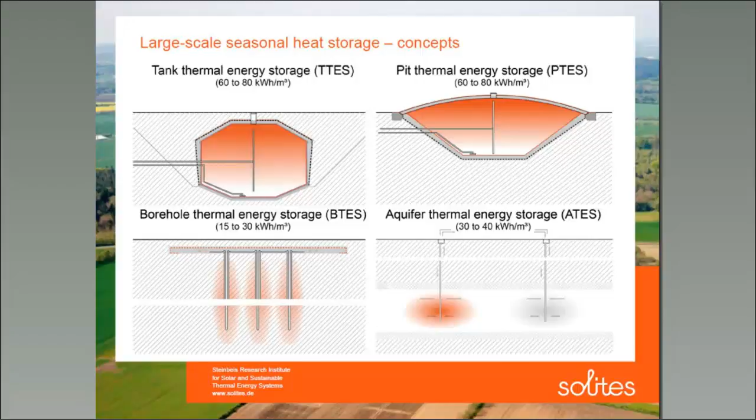The aquifer storage is an open system, so for bringing the heat into the ground or extracting it from the ground, groundwater is extracted from the ground layers and is heated up or cooled down by the system on top, and afterwards re-injected into the ground. So the following 2 projects I will present you are, as mentioned before, the first one with a pit thermal energy storage and the second one with a borehole thermal energy storage.

So on this slide you can see an air view of the solar system in Dronninglund in Denmark. We can see in the center the main heat source is the large solar collector field with almost 38,000 square meters of solar collectors. A little bit more in the back on the left we see the cover of the pit thermal energy storage with a volume of 63,000 cubic meters.

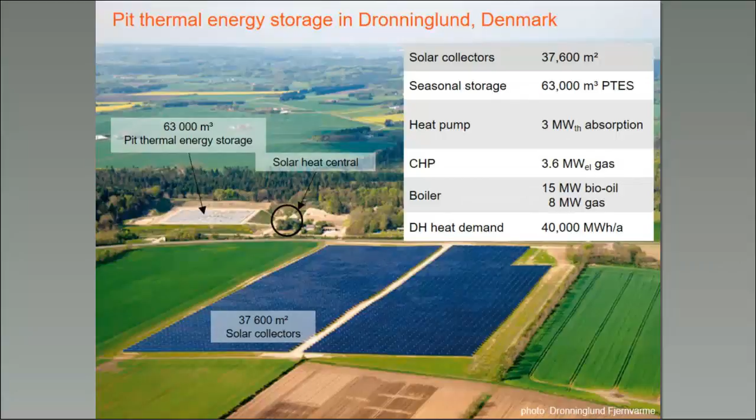This solar system is then connected by district heating pipes to the main district heating plant. In the district heating plant, as we can see in this table on the upper right side, there are some more energy producers like a heat pump, a CHP unit, some boilers, and the entire heat demand of the district heating network is about 40,000 megawatt hours a year.

Here you can see some pictures from the construction phase of the pit storage. On the upper left side, you can see the situation at the end of the groundworks. So the pit is realized and the walls are prepared for the installation of the liner. On the upper right side, you can see the plastic liner after installation. So the plastic liner at the bottom and at the side walls. It's an HDPE liner.

On both pictures, you can see in the center this tower. These are the charging and discharging devices. So there are possibilities on 3 levels to extract and inject water. The lower left side shows the storage after filling with the water.

And on the lower right side, you can see the cover construction, kind of a vertical section. So starting on the water surface with another HDPE liner that is floating on the water surface, followed by some supporting layers like some mesh grids and fleece, protecting fleece layers, and then followed by 3 layers of insulation material that are then covered and protected by another plastic liner to the surface.

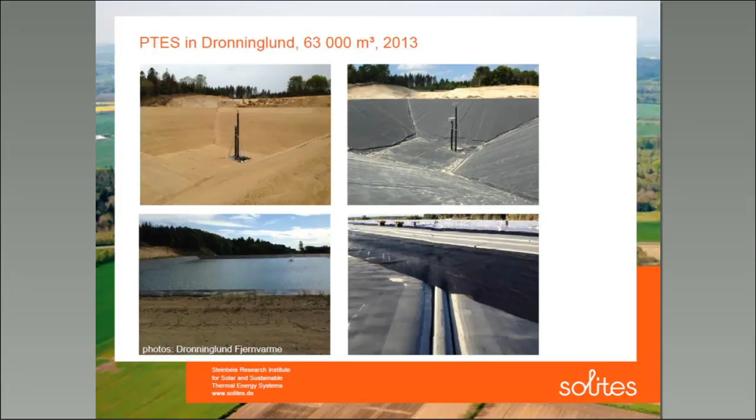So coming to some monitoring results, we can see on this graph the monthly heat balance for a 2 years period for the years 2014 and 2015. The orange bars show the monthly heat that has been charged to the storage, and the green bars show the monthly heat that has been discharged from the storage. The black dashed line shows the energy content development inside the storage volume.

So if we look at the orange bars, we can see a seasonal development. The main charging during the summer period and hardly any charging during the winter period. If we look at the green bars, at the discharging development, we can also see a seasonal development, but it's not so clearly separated as for the charging. So during the summer period, we can also see large amounts of discharging. So this shows us that the storage is not only used for seasonal storage, but also in parallel for short-term storage.

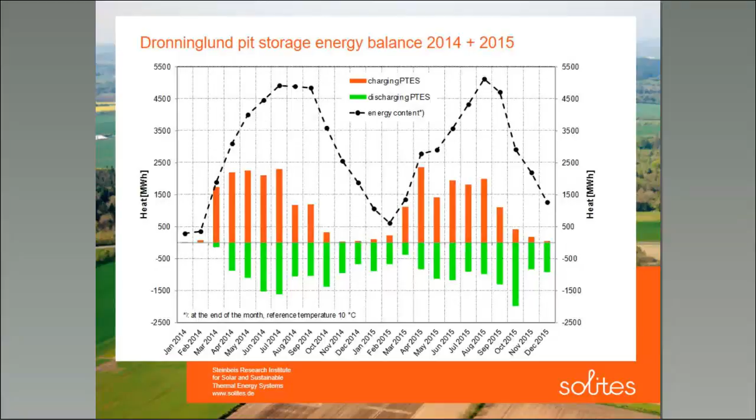Here we can see the temperature development in the same period, so 2014 and 2015. The colored lines show temperatures on different height levels inside the storage. So the black and the red and orange lines show temperatures more on the top of the storage, and the blue lines show the temperatures at the bottom of the storage.

We can see at the beginning of 2014, the start situation was more or less 14 to 15 degrees of temperature in the entire storage. After the charging period, until the summer, we reached maximum temperatures of some 85, almost 90 degrees on the top of the storage. At the bottom, at that time, we have temperatures between 50 and 70 degrees. From something around October, the discharging period starts.

Can you see this pointer? I don't think it works really good.

So around October, the discharging period starts and ends somewhere in February in the following year. Somewhere in the middle of the discharging period, you can see a kind of a step function. This is somewhere beginning of November. At this time, the temperature level on top of the storage was not high enough anymore to be used directly in the district heating network.

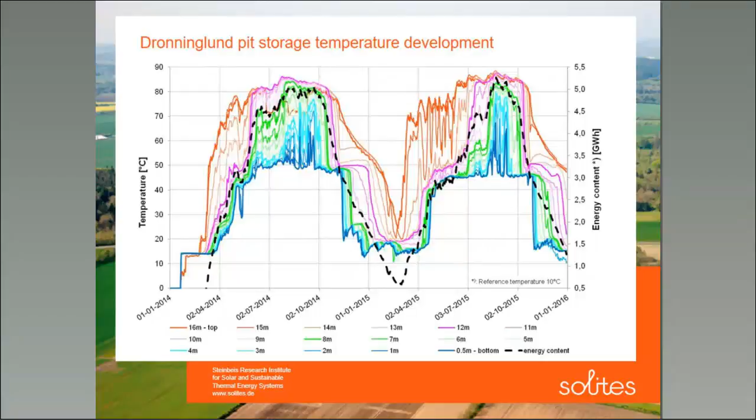If we look at the yearly figures of the storage, we can see here the main energy flows of the storage. In the entire year 2015, we had almost 13 gigawatt hours of heat that were charged into the storage, and a little less than 12 gigawatt hours that were discharged from the storage. And from the heat balance, we can calculate the thermal losses of the storage to a little bit more than 1 gigawatt hour, so 1,275 megawatt hours for the year 2015.

From these yearly numbers, we can calculate some characteristic figures that you can see on the upper part. For example, the storage efficiency. This is defined as the amount of heat that was discharged from the storage referred to the amount of heat that was charged to the storage. We can also calculate the so-called number of storage cycles to 2.2. This is an indicator for the heat turnover of the storage.

So it is defined as the amount of heat that was discharged from the storage referred to the heat capacity of the storage. And with the given temperatures, we can calculate the heat capacity of the storage to some 5,500 megawatt hours. So far to the first example.

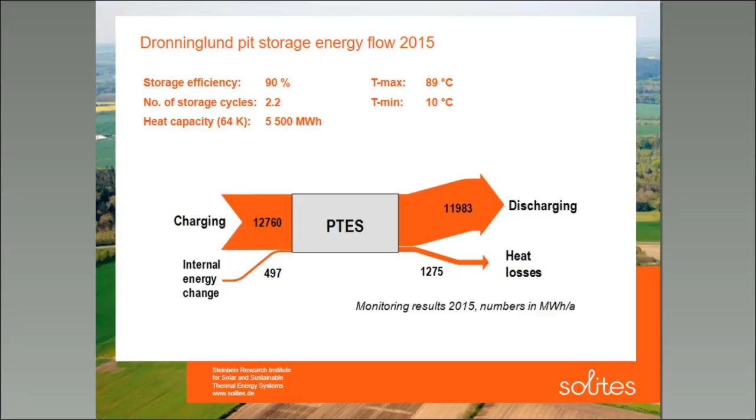I will now move to the second project, the borehole storage project in Crailsheim, in Germany. I think there is some background picture missing, but never mind. We can see a site map of the area in this graph. It is a mainly new built residential area that is supplied by this system. The yearly heat demand is in the range of 4,100 megawatt hours a year, so the system is much smaller than the one we have seen before.

In total, there are 7,300 square meters of solar collectors installed in Crailsheim. We have the seasonal storage. The borehole storage is located in the center of the map that we can see here. It has a ground volume of about 38,000 cubic meters. In addition to this borehole storage, we have two water tanks as buffer storages, so one with 100 cubic meters and a second one with 480 cubic meters.

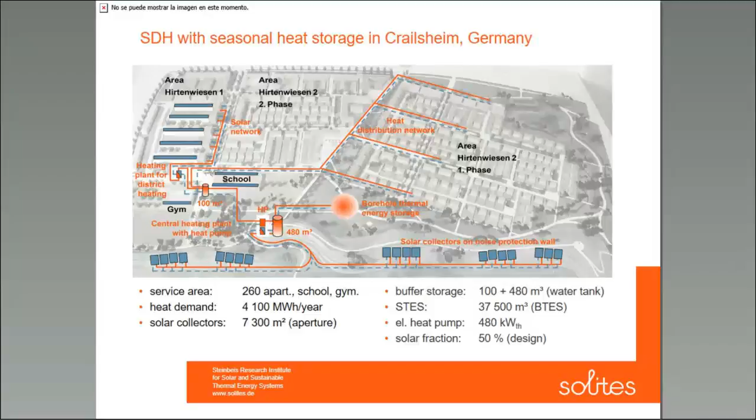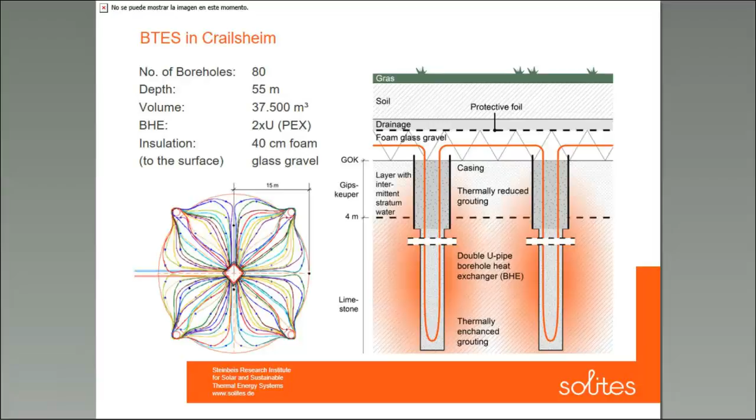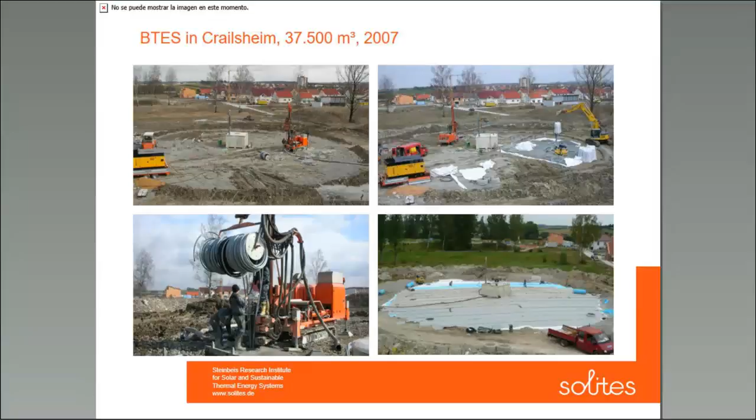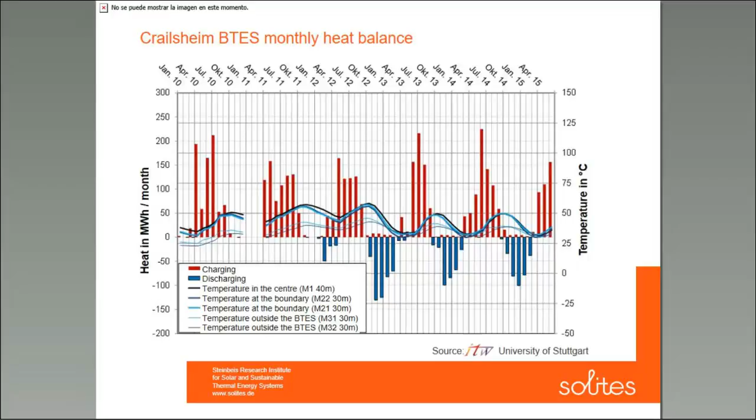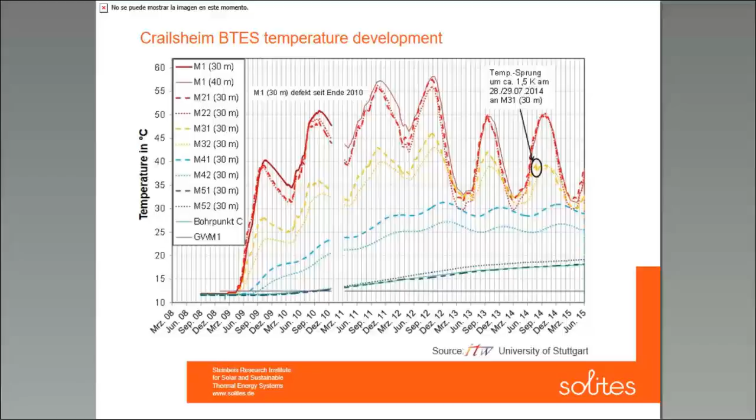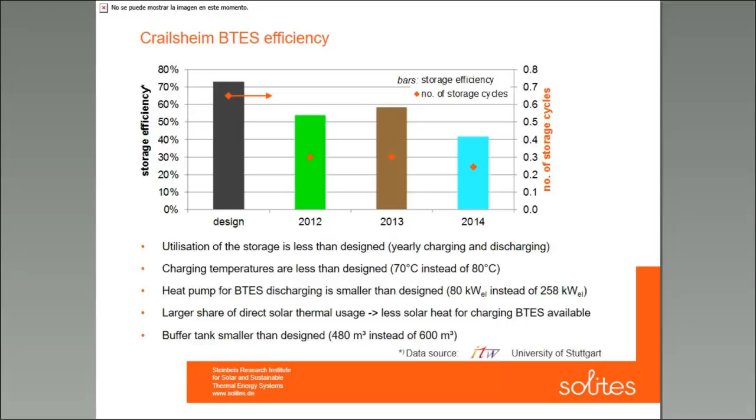There are some more smaller reasons, like the heat pump is smaller than designed, the buffer tank is smaller, and so on. So in the end, less heat has been charged into the storage, and for this reason also less heat could be discharged from the storage. So I will skip that one because of time reasons.

So to come to the summary, seasonal heat storage allows for high shares of renewable energies in district heating systems. So in the presented examples, we have solar shares of 40 to 50%. A high storage efficiency, as for example proved by the data that has been shown for the system in Dronninglund. However, we see, especially in the second plant, in the BTES system in Crailsheim, that the efficiency of a

seasonal heat storage is strongly depending on the system integration in terms of temperature levels that are necessary for the system and can be delivered to the system, and also power rates, for example, and also on the utilization of the storage by the system.

Okay, Thomas, thank you very much. I think it was very interesting. I mean, seasonal storage looks like a weird animal, I would say, to many people, even in the energy sector. So it's very interesting to look at real performance data, especially about efficiency and about the temperatures that can really be reached during summer.

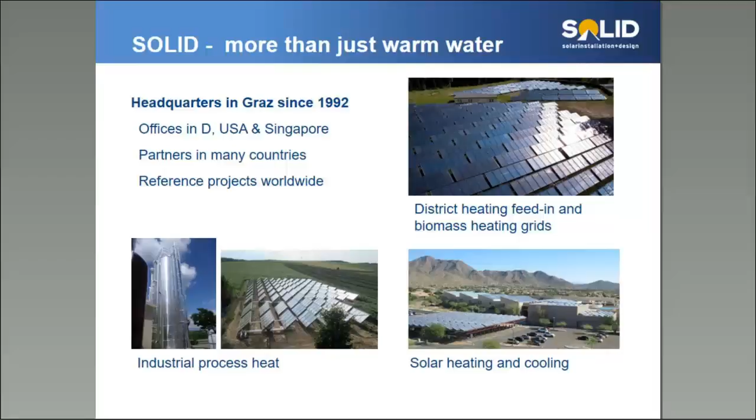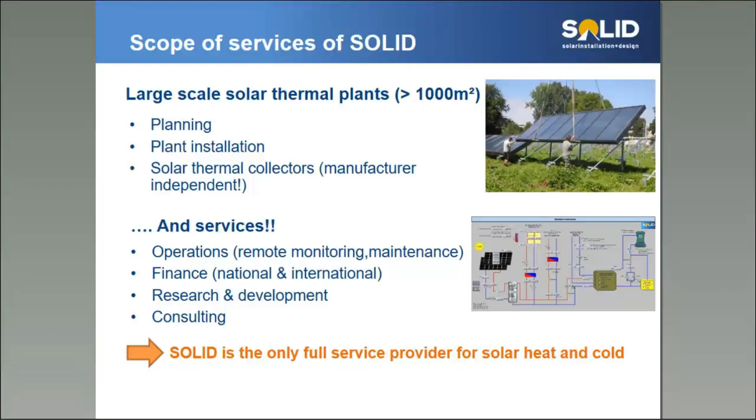Our USP is on the one hand that we have the know-how in large-scale solar thermal plants, meaning for us bigger than 1,000 square meter collector field. And on the other hand, Solid is also a full service provider. That means we're doing everything from the first contact with the client until maintenance and operations. So let's start with the first solar district heating plants we installed in the 90s.

The story of solar district heating in Austria started especially in the rural areas of Austria in the early 90s with the combination of biomass and solar. In Austria, we have quite a huge amount of biomass plants, and at these times a lot of operators of these biomass district heating grids realized the benefits of solar, and so we installed the first plant

in 1994 in Deutsch Tschantschendorf, which is a small village with 600 inhabitants in the east of Austria, with 325 square meter collectors, a 40 cubic meter hot water tank, and 350 kilowatt biomass boiler.

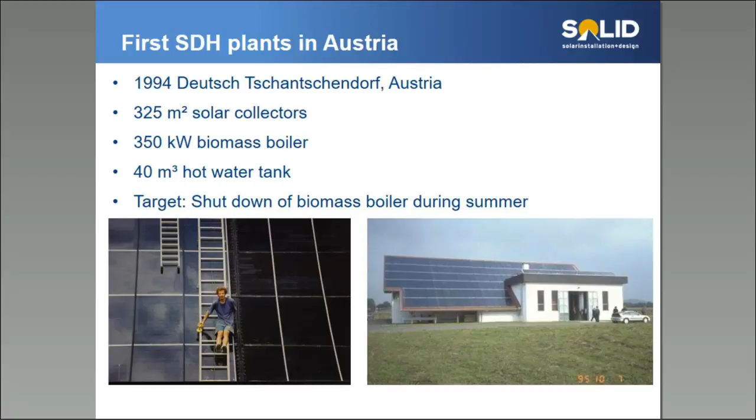By the way, the guy you see on the roof on the left side is my boss, the CEO of Solid, Christian Holter. So it's quite a long time ago, I would say.

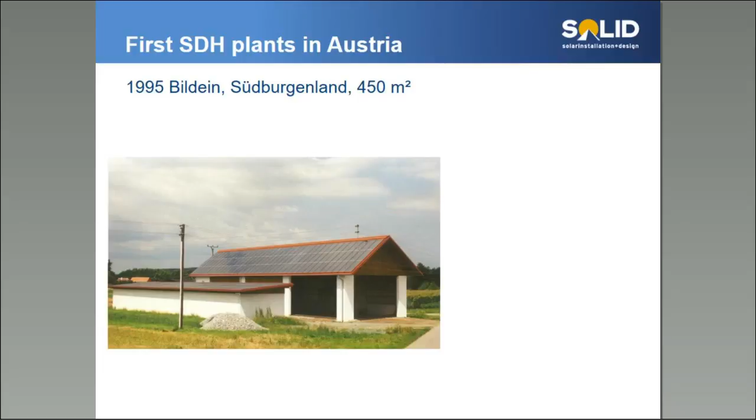Then we move on with a collector field or a solar thermal plant in 1995 in the east of Austria. It's 450 square meters. The next plant we installed in 96 in Urbersdorf, also a small village, with 360 square meters. And all these plants are in combination with biomass.

So in 1997, the Eibiswald project was definitely for us the highlight, as it was the first plant in Austria over 1,200 square meters, and the collector area was installed on the biomass storage building. In general, we could reach a solar fraction of 90% of the summer demand in summertime, and the surplus heat could additionally be used for drying the wood chips in this building, which was quite useful, I would say.

And the success story continues, because in the years after that, the demand of the district heating increased and increased. And then in 2012, the client ordered another 1,200 square meters to cover the summer demand again.

Okay, that was the introduction of some smaller solar district heating plants in the rural areas, and now we are coming to these distributed solar district heating plants in Graz. The first solar feeding plant in Graz was installed in 2002 with a collector area of 1,407 square meters, and this was also a kind of pilot project for solar thermal for district heating. I think it was a strong commitment of the city of Graz to renewable energies in general.

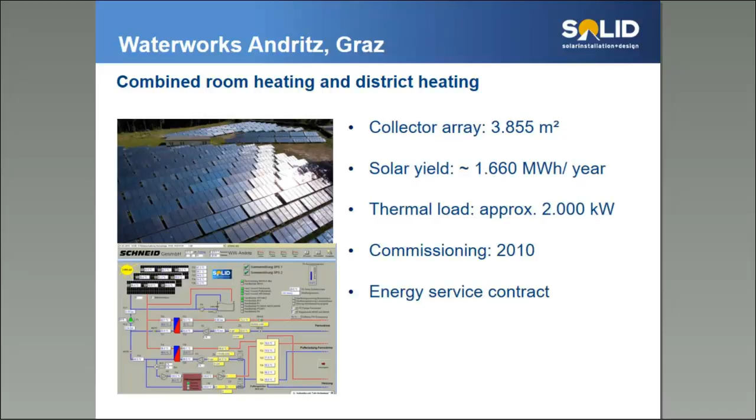And the surrounding buildings you can see here are also supported with solar heat in wintertime and in the shoulder season. So some words on the hydraulics. This is a very simple hydraulic. We have the collector field, and then first the heat exchanger, which is feeding into the district heating grid. You have the heat exchanger which transfers the heat to the storage tank. And from the storage tank, the heat goes to the buildings in winter for heating.

And additionally, as I already told you, we have a heat pump. This was financed with an R&D project with the goal to use the low temperatures in wintertime, in the shoulder season and in the evenings to increase the solar yield in total. The experience with this heat pump was that we have quite a good COP of 4 on average, but the problem is that we have quite a low amount of operation hours, and of course this doesn't make it very economic.

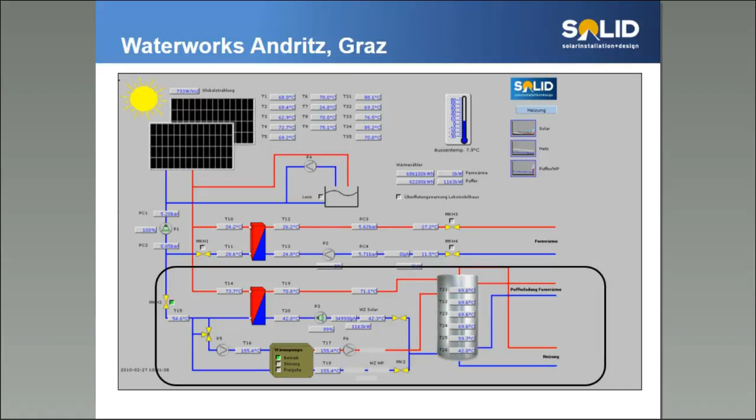Yes, we have quite a high solar heat for this project because of the combination of room heating and solar district heating. And yeah, that's it.

And now we are coming to the last project in Graz. It's actually the biggest solar thermal plant in Austria. We started with the installation of 5,000 square meters on the roofs of the waste treatment facility in Graz in 2007. And then from 2014 till 2016, a further 2,750 square meters of collector area were installed on the premises nearby the district heating plant of Graz, which you can see in the second picture on the right.

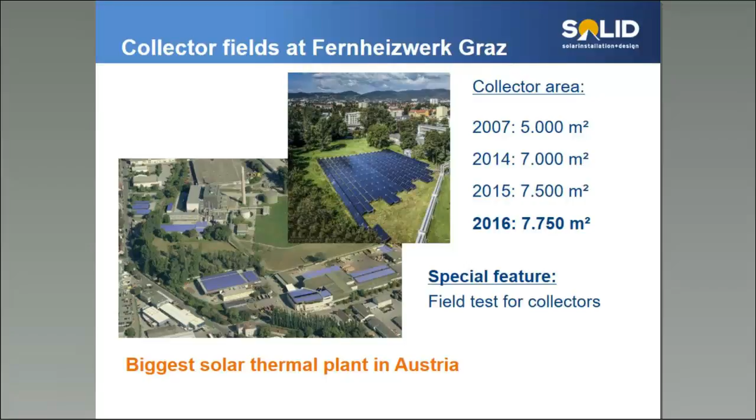It's also a very simple hydraulic in general, but the special feature of this project is that the system extension, the 2,750 square meters, has been realized with 6 different collector types from 5 different, quite well-known collector producers. And these collectors are now compared in a large-scale field test under a scientific survey. Yes, to the solar yield for this plant of the Fernheizwerk.

But I think the really interesting and impressive thing is that we can already say we can now reach 470 to 500 kilowatt hours per square meter a year, compared to the first plant that we have in Graz, with almost the same conditions, at least regarding the return temperatures. So there is really a high increase of solar yield comparing UPC Arena in 2002 and 13 years later, 2015.

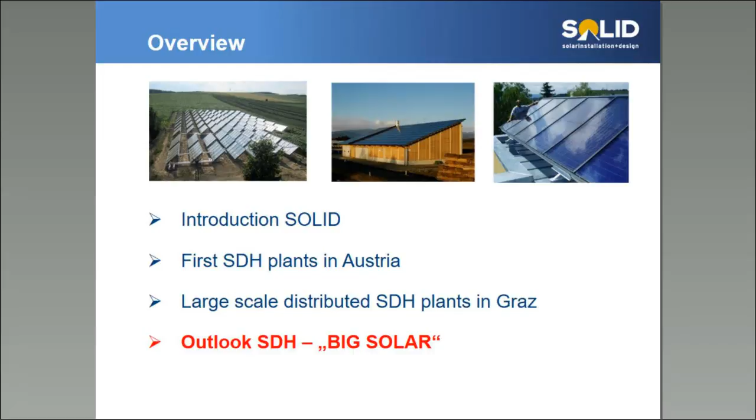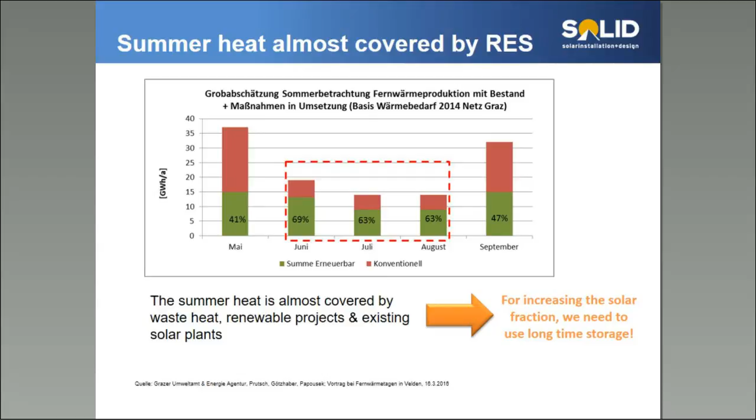So what is the solution? For us, the clear solution is we need to use long-term storage, of course, and also in bigger dimensions like we have in Denmark. So I prepared one slide, though I could talk more than 15 or 20 minutes about just this project. I would like to tell you about it because we said, okay, it is economic, it is technically feasible. We made a quite detailed feasibility study together with some partners, with the energy utility of Styria and the local energy agency of Graz.

The economically most feasible concept has shown the following figures: a collector area of 450,000 square meters, a seasonal storage of 1.8 million cubic meters, and absorption heat pumps with a total size of 100 megawatts. The nice thing is that we can then cover more than 20% of the total district heating demand. Now, with the 3 plants I showed you before, we reach roughly 1%. The heat generation cost is also quite interesting: we calculated around 35 euros per megawatt hour.

So the summary: in the last 20 years, I think we have shown with a lot of projects that solar district heating is not innovative anymore. It's a proven technology already. I showed you before that the collector efficiency has increased, and especially the quality of flat plate collectors. And I'm convinced that big solar solutions like we have now in Denmark are the future, and not the future in 5 years or 3 years. It's now, in combination with seasonal storage.

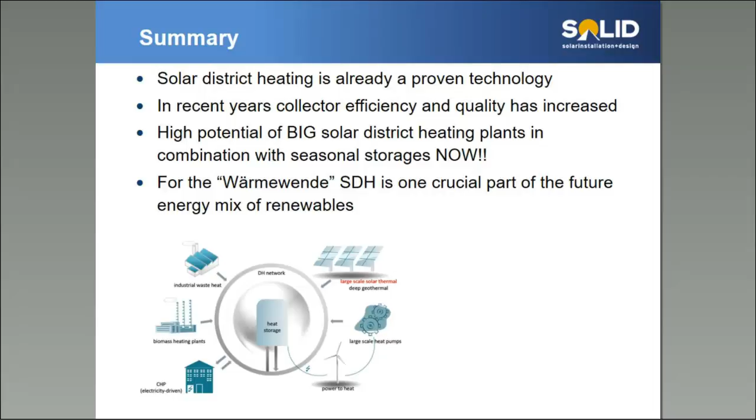It will be a mix of a lot of energy sources like industrial waste heat, like biomass heating plants, CHP, and so on. And therefore, I think in this concept, solar district heating plays really a crucial part for the future energy mix of renewables.

And I would like to sum up with one slide, which I saw already twice from Paul Voss, the managing director of Euroheat and Power. He was very proud in these two conferences when he made his presentation that heating and cooling is already on the agenda in the EU, in the European energy transition, and I think that is also quite good for solar.

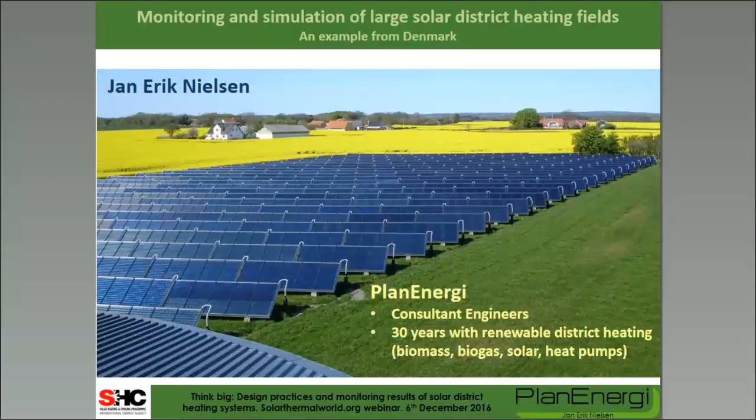So yes, in Denmark we have been quite successful in solar district heating. In round figures, I think we have around 100 plants and altogether more than 1 million square meters of these systems. But today I will be a bit more specific on the subject. I will talk about how we can check if these systems are performing as they should or as expected. So I will present a quasi-dynamic model for simulation of these fields, and this could lead to a method for how to control the systems online.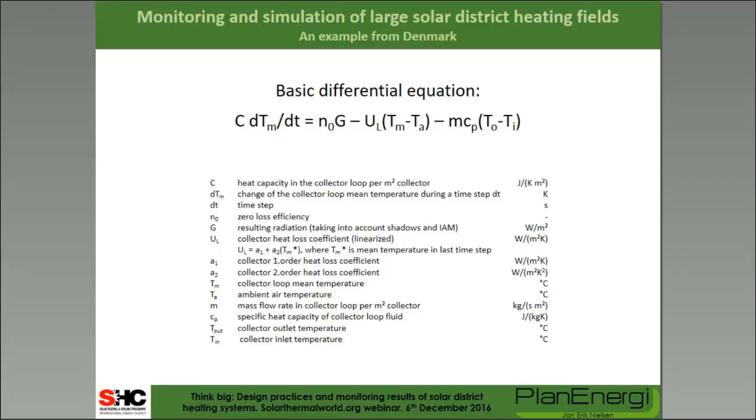So the basic equation for this quasi-dynamic model is well known, I think, and quite simple. So you see it here. It's the capacity and the change in temperature per time, which equals what comes in and what goes out of the collector field. So we have the solar radiation and the heat loss and the output of the collector field on the right side.

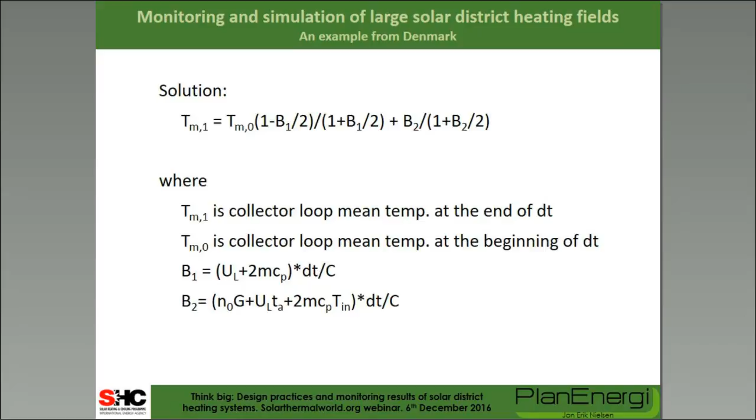So there's a solution to this. It looks maybe strange, but it's not so complicated, so it can be incorporated in the online control system if you want. And here is the equation for the collector loop mean temperature at the end of a time step. And this is one of the things we are checking on. So we can calculate the outlet temperature and the calculated output during this time step.

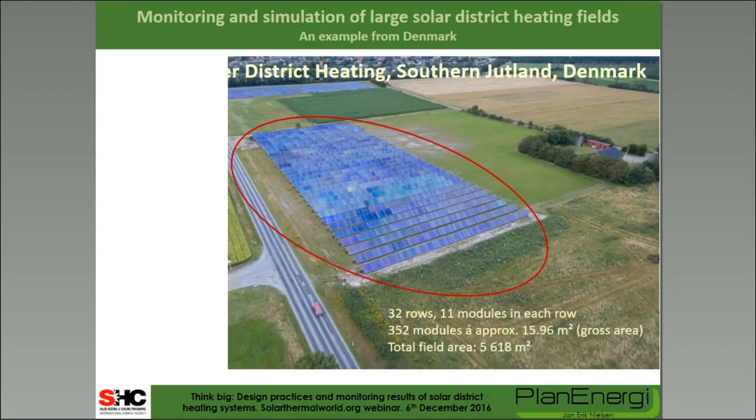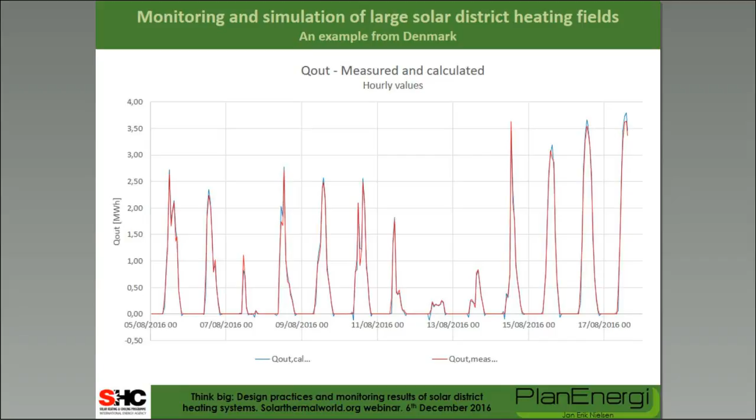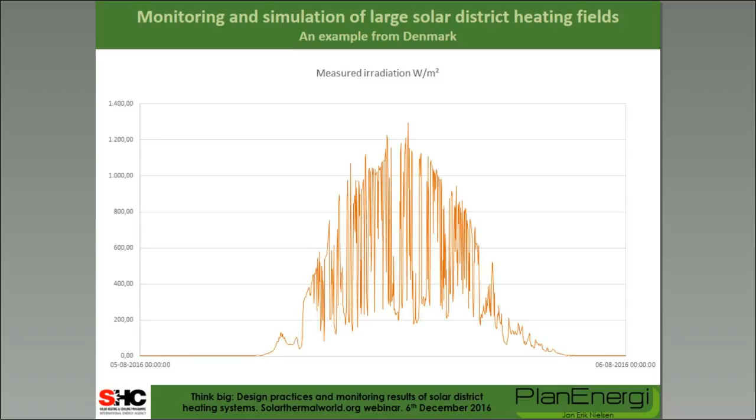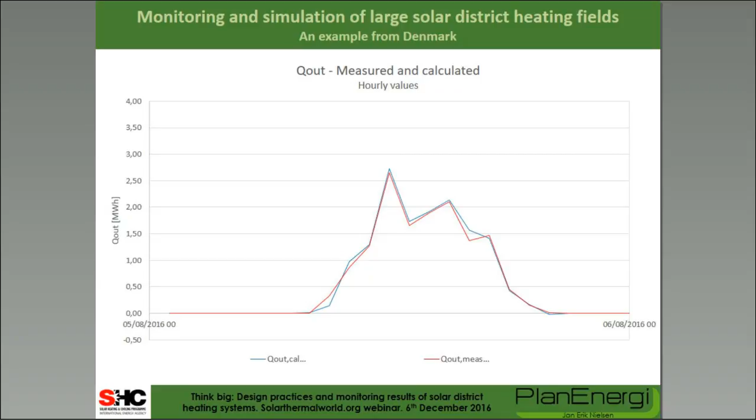And then looking at the hourly calculated output and comparing this with the measured one, you see also an extremely good agreement. Just to show you one day, this is one day of solar radiation. You see how much it varies all the time. And this is then the same day with the T out measured and calculated. And same for Q out. So even though we have a very up and down in the solar radiation, we calculate quite good what's coming out of the system, even though we use hourly values.

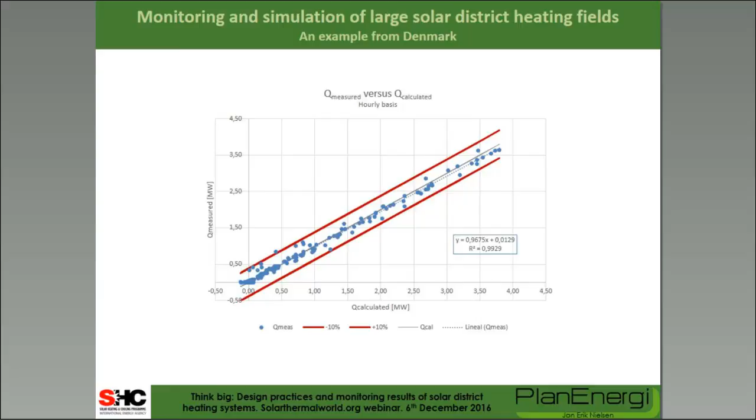This is then the measured compared to the calculated, so this should be a 45-degree line. If everything was ideal they should be on this center line, but you see they are almost on the center line, and all of them, except one I think, are within plus minus 10% on an hourly basis, and this is also quite good. Of course, looking at the daily values, you have even better agreement, and you see in the end the average. I think for the whole period we get less than 1% in deviation. So this is maybe better than expected. So we are quite happy.

Then this is what you could use it for. You can put in some warning criteria. I'll try to use this arrow. Every time there is a deviation of more than something between the measured and calculated value, you can put a warning or an error. So this is to warn the operator that he should maybe check. And here I put some quite narrow or strict requirements just to see that some warnings are coming. And these are always in the morning, so the morning is the most difficult period for the model to fix. So this is on the Q, and you can do the same on the outlet temperature, and you get warnings and a single error also here. So this can then be used by the operator to see online if the system is always working as it should, and you can very fast take corrective actions if necessary.

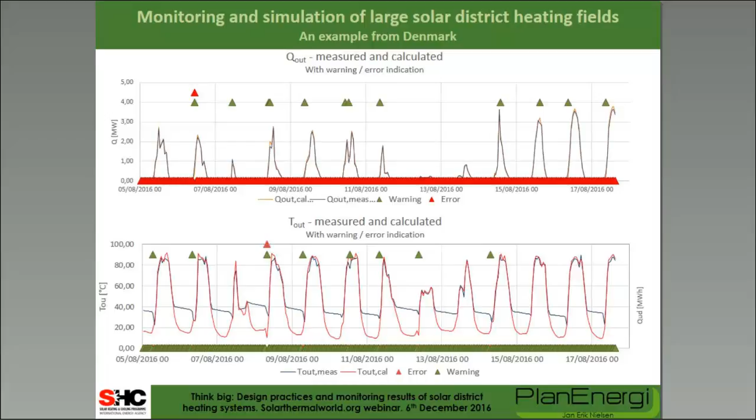So this was it actually, but I can tell you that you can see 50 systems in Denmark, and they have a lot of measurement data and also data on economy and so on. So if you click into this website, which is now also available in English, you can see a lot of details on the Danish systems and also measurements.